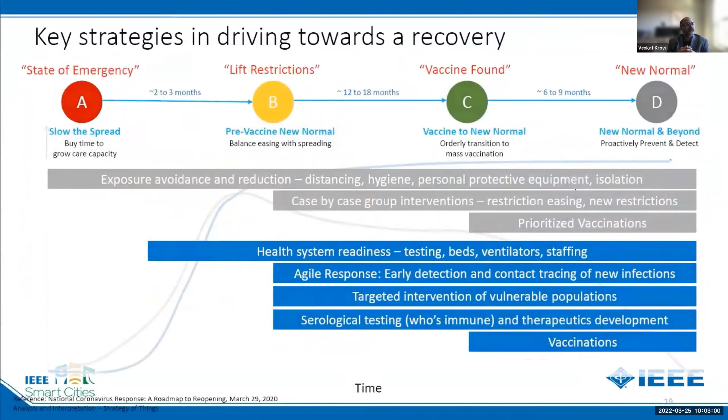We also have many educational activities within IEEE Smart Cities, including activities that count towards continuing education units. The most popular is the IEEE Smart Cities webinar, which counts with high-level technical specialists from many parts of the world, speaking about their findings on the latest trends, technologies, and solutions for smart cities. You can find the educational activities and publications in the IEEE Smart Cities Resource Center.

In 2014, IEEE Smart Cities implemented a core and affiliated smart cities program in an effort to create a community to share best practices, discuss technical topics, and create a vibrant and worldwide grid of cities on the path to smartification. We also have 12 affiliated smart cities in 4 continents. And in the last 6 years, we have reunited our community at the core cities for the IEEE International Smart Cities Conference. This conference brings together practitioners, city policymakers and administrators, infrastructure operators, industry representatives, and researchers to present technologies and applications, share their experiences and points of view about current and future smart city applications.

This year, the IEEE International Smart Cities Conference is going virtual. We look forward to you having the best experience wherever you are around the globe. We know that the pandemic restricted our opportunities to get together in person, in conferences and physical events, but we can still reunite through virtual conferences and webinars. To keep up to date with the IEEE Smart Cities community activities, join us on our social media channels on Twitter, Instagram, and LinkedIn. If you haven't joined the IEEE Smart Cities community yet, please access smartcities.ieee.org to learn how.

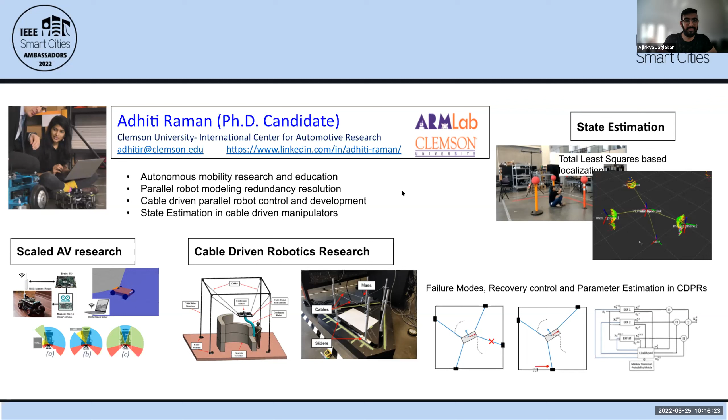Thank you, Adhiti. Lastly, I wanted to quickly introduce myself and how we got engaged with the F1TENTH program. I moved to Clemson in 2016, and as I was looking to develop a new course in robotics, I had a chance to speak with Rahul. At that time, Penn was starting to roll out the F1TENTH program internally and inviting partners to join. So in January of 2017, we deployed the first class outside of Penn with the F1TENTH program, and at that point in time, Adhiti was the TA for the course.

Since then, she's helped deploy this with other industrial partners. Our overall research looks at connected autonomy systems that blend autonomous systems—sense, think, and act in real time—with this notion of connectivity, to deploy this across a range of application arenas. There's the on-road application everyone is familiar with for self-driving cars, but there's a big future in non-traditional platforms, like two-wheel platforms. There's an entire off-road arena that started with space robotics and is now growing into precision agriculture, and last but not least, the manufacturing shop floor. Our students have found the same technology base from the F1TENTH program very useful for branching into other arenas.

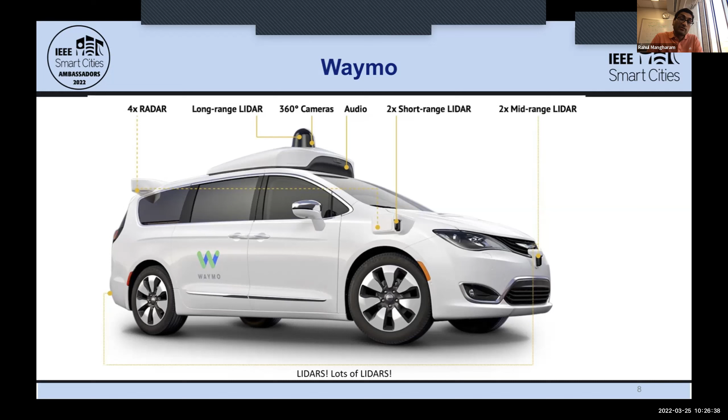It's similar on a different level. Waymo from Google has a mix of radars, lidars, cameras, and a lot of sensors involved. A lot of redundancy. They're taking much more diversity in the sensors they have to extract depth, to get much more semantic understanding of the environment. And they have both what the systems are running online versus all these companies have a lot of training that is being done offline, based on all the collected miles that they have.

Uber, for example, again has a mix of cameras and lidars. Just to give you an example, these are mostly retrofitted on existing gasoline-based vehicles. And the future is really going to a very different kind of platform where we have electric vehicles based on skateboard chassis, which are going to be very standardized. And then the autonomy aspect will be much more simpler, much more efficient, because you're working off very standardized chassis. You don't have to retrofit these legacy vehicles.

So you can think of autonomous vehicles 1.0 as: let's invest heavily in building maps and HD maps, and invest heavily in actually rolling out these vehicles and getting a lot of miles under the hood. And then autonomous vehicles 2.0 are on more efficient electric vehicle platforms, standardized chassis, and they are going to be much more reliant on learning-based approaches, which are like these end-to-end learning-based approaches. And as we'll see towards the end, these provide a lot of unknown and high risk, and that's one of the challenges.

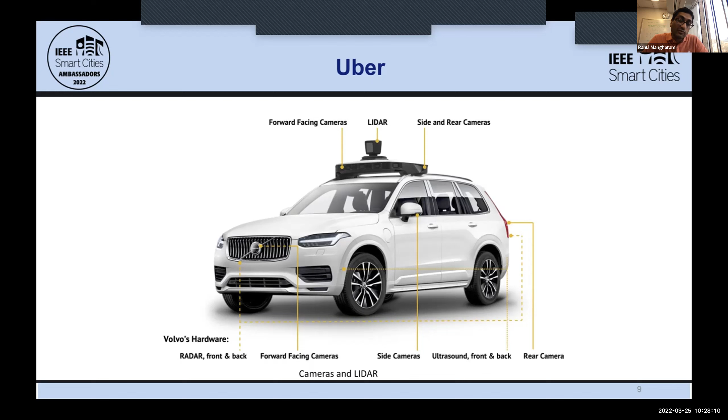So we like to think of autonomous vehicles, and specifically autonomous racing, as literally and metaphorically a vehicle for learning about these safety critical environments and safety critical systems. So we are not necessarily only focusing on vehicles, but it's today's model, today's system to understand what future autonomous vehicle challenges, autonomous system challenges we'll have.

So all of that is fed into the sensors and perception block, and that then feeds into the planners. Essentially, we're going to go through this loop of sense, plan, and then act, and do this loop about 20 to 100 times a second, so that we can keep updating the system.

So as we plan now, the mission planner is like Google Maps. It's saying, okay, I want to go from Philadelphia to Times Square in Manhattan, and says, take this path, get onto the highway I-95, and then drive for 100 minutes along that way. The behavioral planner then says, okay, in order for me to get to the highway, I need to take this on-ramp, I need to switch to the left lane, I need to overtake this vehicle. So it's making these discrete choices based on the local environment. And it's very different from a mission planner, which is really just looking at the global view over several minutes. The behavioral planner is looking at the tens of seconds.

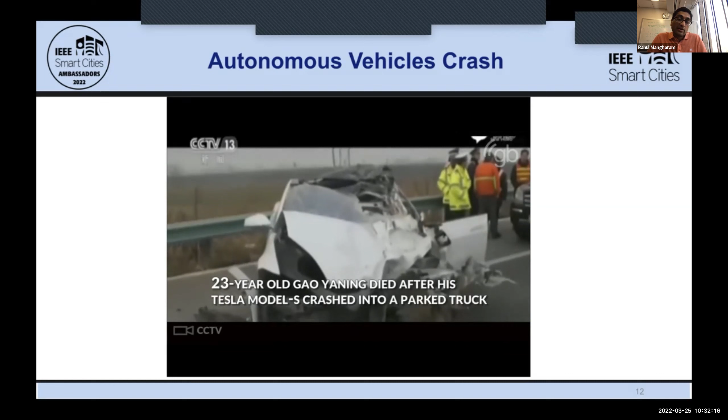Then again, later in 2016, there's a higher speed drive of a Tesla on the road, and it sees the street sweeper on the left-hand side. The vehicle just goes and crashes into it, and a 23-year-old male dies on the spot. This is something that, as drivers, we would have seen and avoided.

Again, this is not anything against Tesla specifically. It's really that they are the only videos we get are from these Tesla vehicles on the road. But this is one of many examples of things to come, and whether this method of evaluation is right or not.

Similarly, in 2018, we see more and more of these cases, vehicles taking a sharp turn along a cliff and crashing onto the side. These continue to go on. It doesn't mean these cases are the predominant cases, but however rare they are, we need to understand the underpinnings of why they're happening and the underlying engineering causes.

That's our focus, because even as recent as last summer, almost 300,000 Tesla vehicles were recalled because of safety concerns due to the autopilot system. This is not just Tesla's issue, it's all the companies and production systems that are going to come onto the road, and how do you evaluate these.

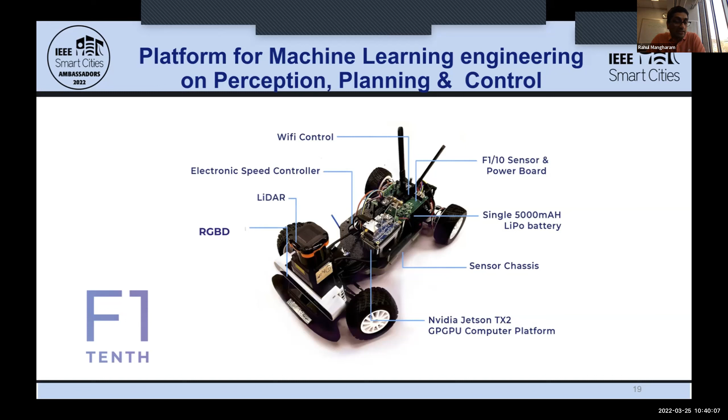I'm going to give you a glimpse of how we do that. We built this reference model of the car, and everyone can use that reference because the hardware has come together, many sensors are put together and integrated into the system. There's a very good autonomous vehicle software stack that covers perception, planning, and control, all running on the onboard NVIDIA system on CPUs and GPUs efficiently. You can use all the algorithms we talk about today out of the box in this system, so you don't have to worry about making a new system or another car. This car is ready. Now let's focus on algorithmic development. That's allowed a lot of research in the IEEE smart cities communities and in robotics communities, to work on safe autonomous systems, secure autonomous systems, multi-vehicle coordinated autonomy, and energy efficient, time efficient algorithms.

And this is all supported through different algorithms and simulation environments that we'll talk through. Our goal for today, and through the course we teach and the F1TENTH community, is to help students, faculty, researchers, and hobbyists build, code, and race these systems. You have a bunch of parts, you put them together in less than 1 to 2 hours, and then you have your vehicle, it's done.

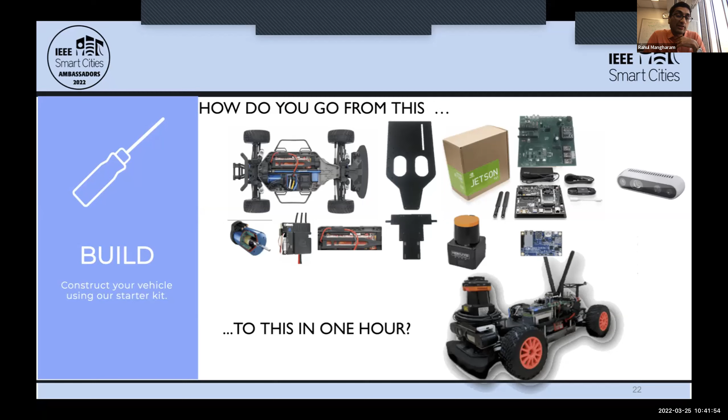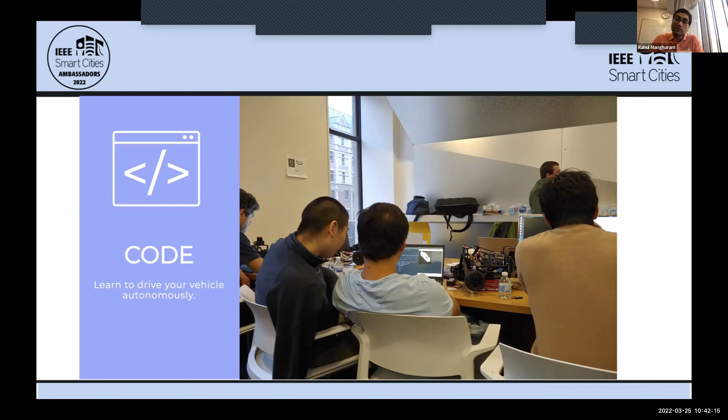The rest of the lectures here are not about how to build your car. That's pretty straightforward. We've done all the groundwork for you, and now you have a car. It's ready to code, and you can directly code on the car itself. The car is running full-blown Linux, so you can just SSH to it or remote desktop into that car, and run your code directly on it. You're not running your code on the laptop and transferring it to the car. You're just actually coding and doing everything on the vehicle.

As part of that, we developed a course schedule, and we offer this course many years. It's also fully online, and all the lectures, videos, and labs are published on the F1TENTH website. This course is broken into 6 different modules, and we'll walk through each of these, taking every student from scratch. We don't assume too much in terms of background knowledge, basically just linear systems, basic probability, and basic coding in Python or C++, but nothing beyond that, because this brings together all these aspects. First we start with the software system and robot operating system, introduce the vehicle, and introduce the simulator.

Then we move on to reactive methods, which basically say, I'm not going to build a map, I don't know much about my environment, I just know what I can see right now, and how am I going to navigate through that world.

Then we go into mapping and localization, where you understand the basics of simultaneous localization and mapping, the math behind it, the software, the code, and the algorithms. Then how do you actually build a map, localize yourself, and once you've localized yourself, how do you plan a path around it? What are simple ways to plan the path? What are more efficient and sophisticated ways to plan around that?

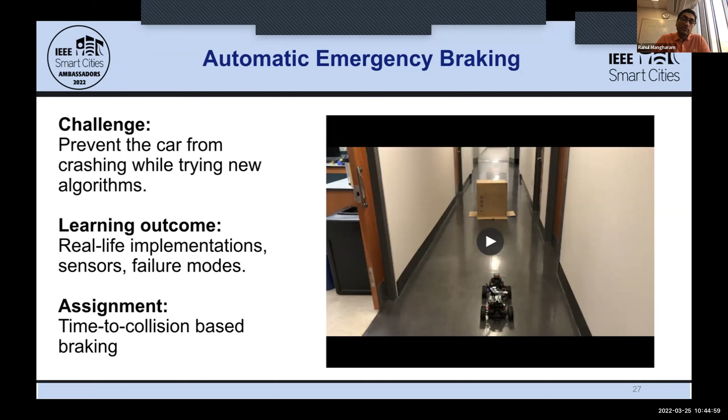In terms of AV driving basics, we'll start with automatic emergency braking. How do you build a car to actually be safe? You don't want it to crash. So how can it sense obstacles? How can it actually stop and do automatic emergency braking before it hits the obstacle? So you understand concepts like time to collision, how to interface LiDAR sensors, how to understand failure modes, what are serious problems in terms of false positives, but more importantly false negatives, and actually detecting that through the LiDAR data you're getting and being able to close that loop.

So that's essentially just the first 2 weeks. You understand ROS, then you deploy the safe thing. You will also use the F1TENTH simulation environments, both in OpenAI-style gym interfaced environments. We have all of this on our F1TENTH website on GitHub. There are also fancier simulation environments like LGSVL that have our F1TENTH race tracks and race cars involved, for more perception-oriented research and development.

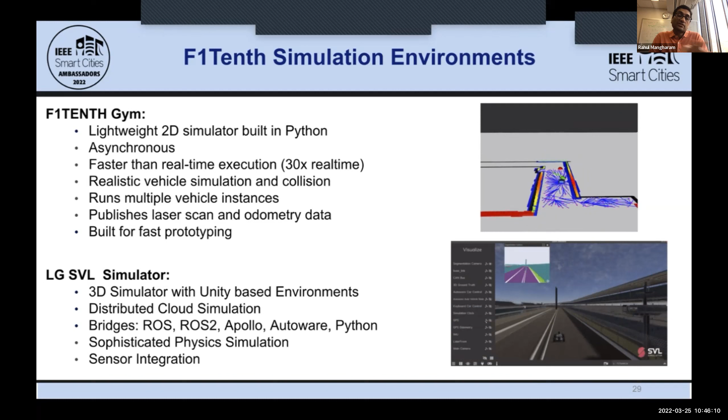The nice part is that this environment makes it very convenient for development. You'd spend about 80% of the time developing rapidly in this environment. You can crash quickly, you can recover, and then whatever code you have running in these environments works directly on the vehicle, and you adjust for reality. So there's simulation and reality, and we are bridging the sim-to-real gap.

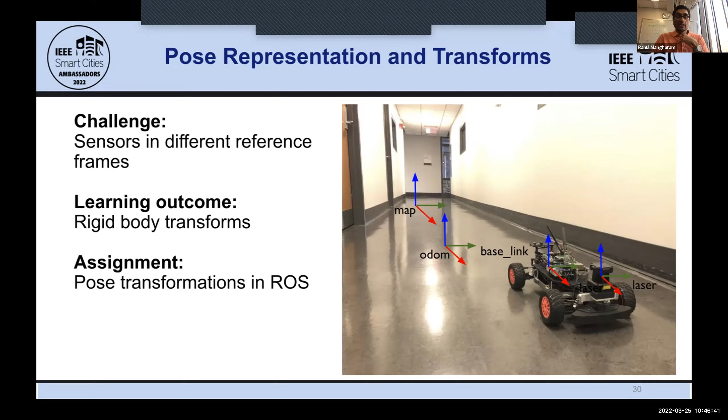So you understand how sensors are placed - that's lidars, cameras, and the basics of kinematics and mechanical engineering in terms of pose representations and rigid body transforms. How do you understand the sensor's view of the world and translate that to the vehicle's view, to the global map view, and whatever problems you have in terms of doing coordinate transforms and pose representations in the real vehicle, because you have multiple sensors and each sensor is viewing the world from its own frame of reference.

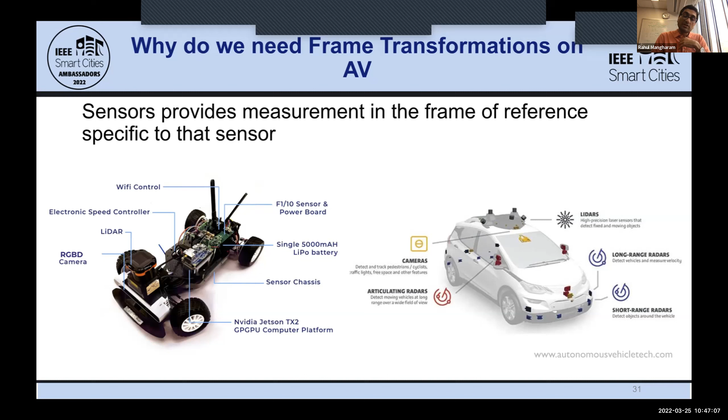How do you combine that to map it into a global reference? We have to do the same thing on our vehicle to capture these multiple sensor views. As you can see, we have a local frame of reference, where the world is moving around us and we are fixed, versus on the left side you have a global frame of reference. How do you translate to that, where it's much easier to understand where you are on a map and combine all the sensor views?

Then you work with the actual vehicle and tune the speed controller and the steering controller, which is an easy to access system - it's all in software now. You don't need to do any soldering or hardware development, you're just tuning the system to understand that, because then you need to understand reactive methods. I'm getting my sensor inputs and I need to do rapid obstacle avoidance - how do I do that?

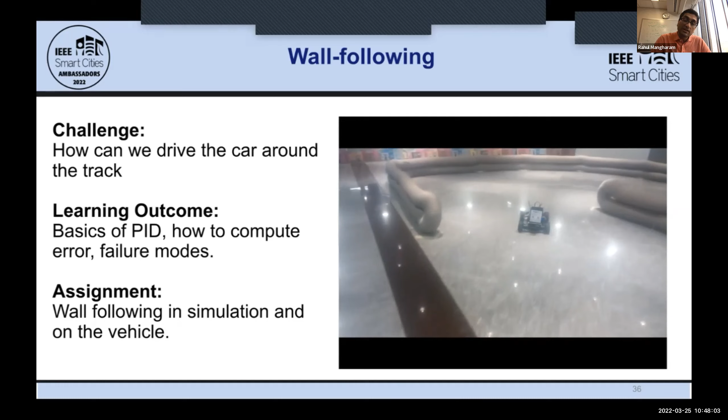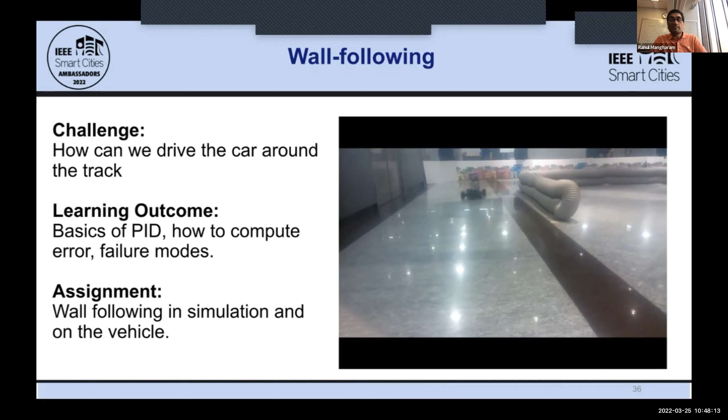So first we have wall following, where you just detect the wall. It's kind of like you'd have in high school or middle school, and then in undergrad courses where you're doing line following, but here we are following the wall using the LiDAR. You can see the vehicle is able to navigate, it's doing it rather slowly. This was how some of the early races we had in 2016, 2017 did that - just reactive methods.

So then you understand how to tune your PID controller. There's a lot of work done by Houssam, who will talk now about how we go from single car to multiple cars later on. But this essentially helps us now in terms of tuning - how do you tune your PID controller to have very smooth navigation and follow a path without much oscillation?

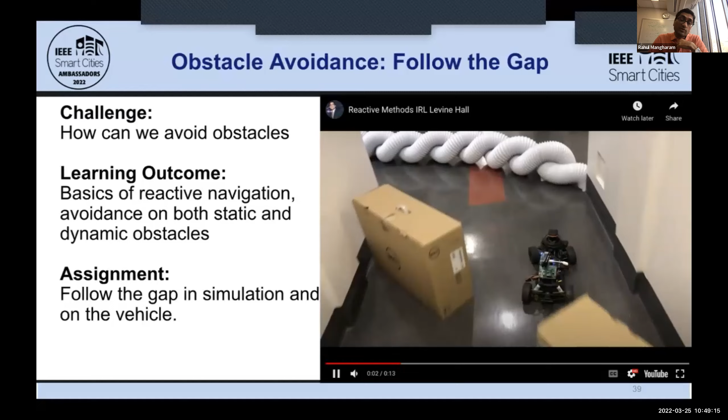So once you have your car tuned and ready to roll, you then program it to do obstacle avoidance. First you do that for the real world map, but in simulation. Once you're able to navigate that very efficiently, then you put the vehicle in the real world and you can see it work in action like that. So the simulation environment helps reduce a lot of frustration also.

Moving forward, the first race is just using these reactive methods. Here's an example of a race we had back in 2018 in Portugal, where you can see the cars going around the track, but just using the LiDAR inputs streaming in. It does not have a sense of a global map - it's still able to do pretty well.

Then moving forward, we have map-based methods. Essentially here we have to understand the basics of scan matching, which is an integral part of the SLAM algorithms, of simultaneous localization algorithms. We understand one particular method called the iterative closest point algorithm - basically, if I have a previous scan and then I take a new scan, how do I try to match these scans to know how the robot has moved from the previous frame to the current frame?

So what are efficient ways to do this? How can you do this in real time? We read a paper that implements this scan matching algorithm, and that allows us to code it up and really get an in-depth look at what's involved under the hood with these SLAM algorithms.

Then we use off-the-shelf SLAM algorithms. These run on the car to actually build a map, and once we have a map of the racetrack, we can drive through that environment. As the car is driving through this environment, we have a very high quality map, and this runs very efficiently on the platform. Now that you have a map, you need to localize yourself.

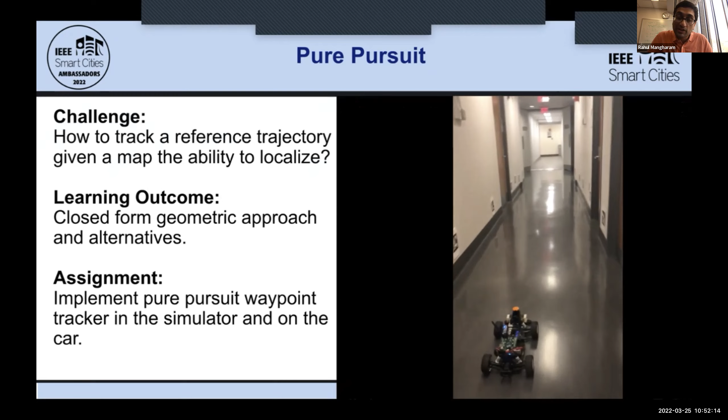Once you're able to do that, you can drive the car much faster. Here you can see our teaching assistant getting a good workout, but this car is now driving twice the speed of the previous reactive methods. So we are getting much better, the car is getting much smarter, much more aware.

That takes us to the next race, where you use these map-based methods to efficiently navigate through the track, figuring out the most efficient pure pursuit path to use. This is from our 2019 competition race in Montreal, where most teams used this approach. We use these competitions to push how we teach the course further, incorporating what was developed in competitions into the curriculum.

That brings us to the final part of motion planning: how do we have more efficient, more agile methods using things like rapidly exploring random trees, and variants of different motion planning methods, which you can do both in simulation and then execute on the real car.

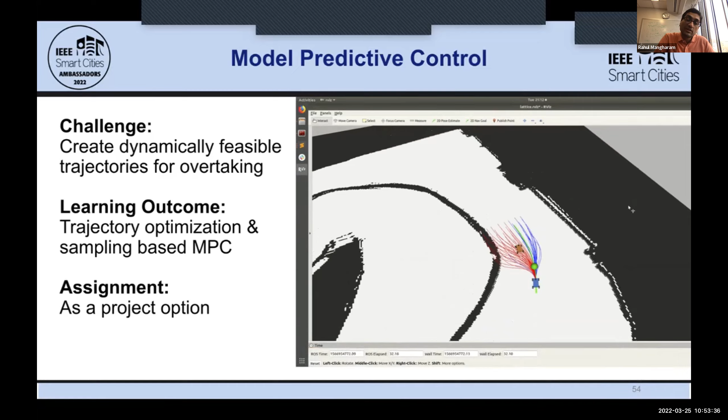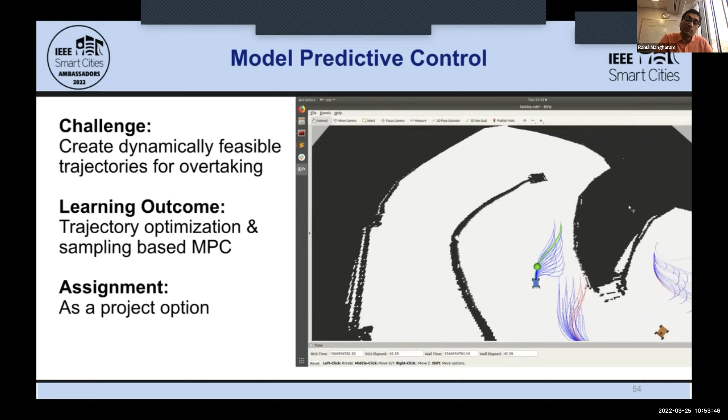In order to track the vehicle along a motion path, we introduce model predictive control as the next step up from PID control, to have a combination of safe and efficient pathways for the vehicle to follow smoothly along the track.

Finally, we introduce different concepts in learning and vision. We start with classic computer vision: how do you detect April tags, how do you estimate the distance of vehicles around you, single view geometry, homography, detecting features, and prediction.

This allows us to have a lab on how to train, based on a data set of vehicle images, a way to identify the vehicle without April tags, developing a convolutional neural network based object detector for overtaking. This is lab 7 out of 8 labs in the course, and students develop this detection pipeline and have to make it run fast. In this video, the pipeline was running at about 72 frames per second on the platform.

That introduces a lot of projects the students then do, like imitation learning, where you drive the car for 5 minutes and the system learns to drive as well or as poorly as you, trying to minimize the error between how you would have driven and how it starts to imitate you. This was one way of training, and was also used as a reinforcement learning based project option.

So when you have a course such as this with a number of obstacles, what is the best way to navigate a course like this? Are there any suggestions from the audience? If not, I should just go ahead and talk about some of the different ways in which navigation of such a course can be addressed.

You can have a map, for example a Hector map or some sort of occupancy grid map of this entire area, create a race line like Dr. Mangharam has mentioned multiple times, and then have a planner in order to move the vehicle around that race line. But another way to approach such a map is to have a reactive planner, that is without any foreknowledge of where the course is, how the course is shaped, or where the obstacles are. A different way to approach this is to have a reactive planner that is only locally reacting to the obstacles and the environment around the vehicle.

So how do we best develop an obstacle avoidance system like that? What are the objectives that we want from something like this? We want to essentially be able to keep away from the walls, at the same time avoid obstacles that are both sparse and cluttered.

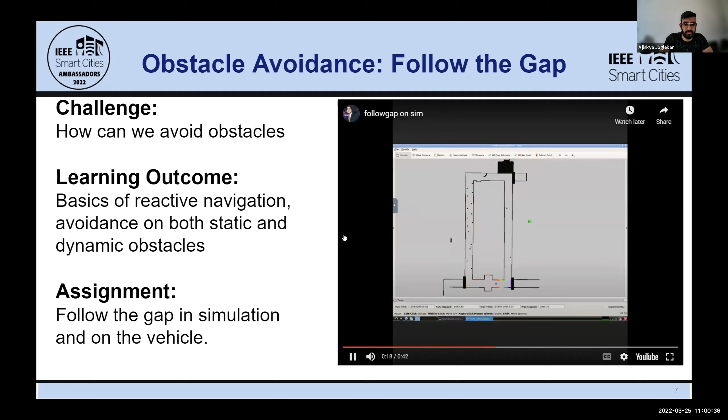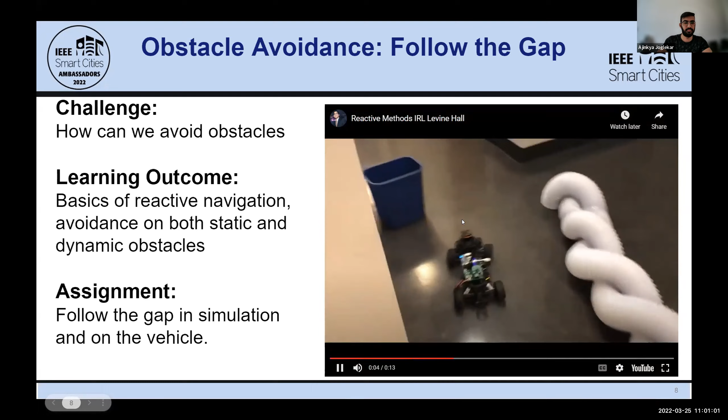As you can see in this video, this vehicle is using a reactive planner in order to navigate this, reacting to a follow the gap algorithm. You can see it's a reactive planner, especially because the PID is not particularly tuned well in this video. You can see certain oscillation as it comes to a smooth walled environment. But the advantages of having a reactive planner such as this is they can be quite agile and very responsive to both cluttered static obstacles as well as dynamic obstacles.

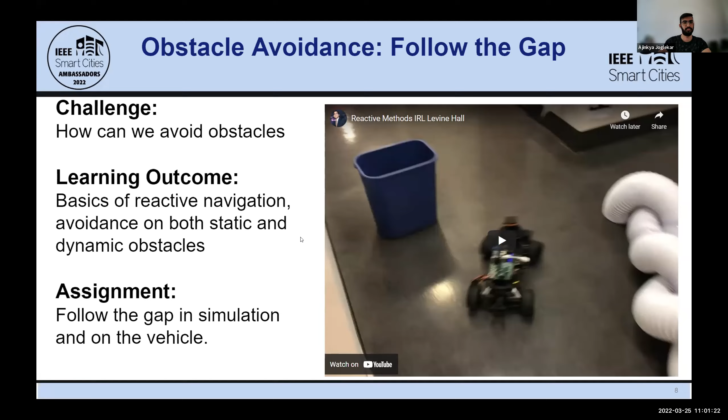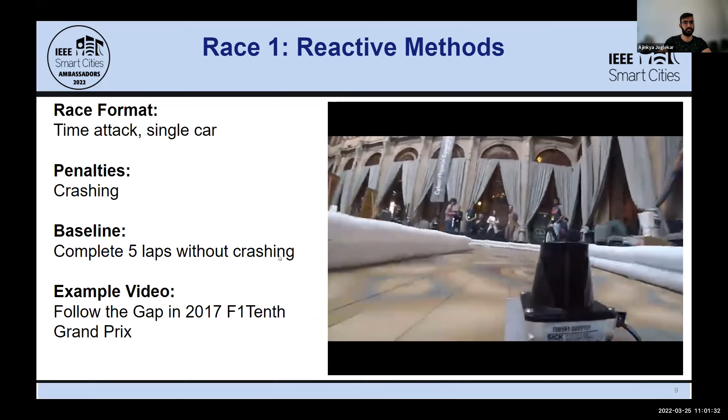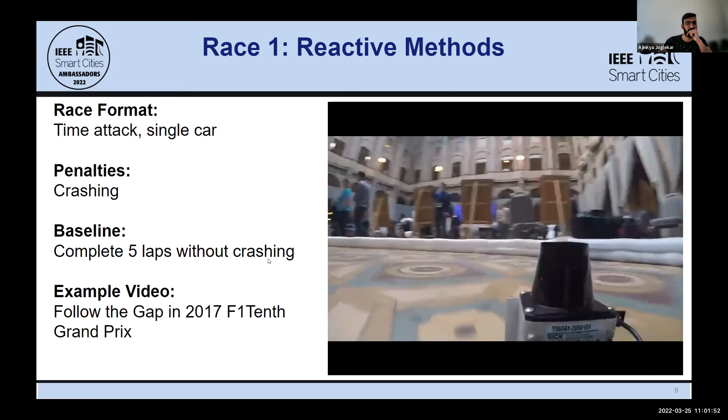In this video, this is a video that Dr. Mangharam's students have taken during their F1Tenth competition in 2017. It's a few years old, but this shows a very effective demonstration of a reactive controller around a track that is free of obstacles. You can see that the vehicle is not necessarily keeping to the center line of the track. It is going fast during straights and slowing down over corners in order to take these turns effectively. It is also a little bit free of the kind of oscillation we saw in the previous video, which shows a very well-tuned controller or certain modifications on a very simple PID controller.

So how do you get to that kind of a performance level? How do you get to that kind of performance without a map, without having a defined race line? One of the more basic controllers is the follow the gap controller, and certain extensions on this very basic follow the gap controller can lead to very good performance from this controller.

Ajinkya and Ameya will discuss the disparity extender and other approaches such as the bug algorithm later on in this lecture. So given that you have a scan of the area, given that you have a LiDAR on the car and you're getting a LiDAR scan of the environment, how do you define the most optimum area that the vehicle should traverse?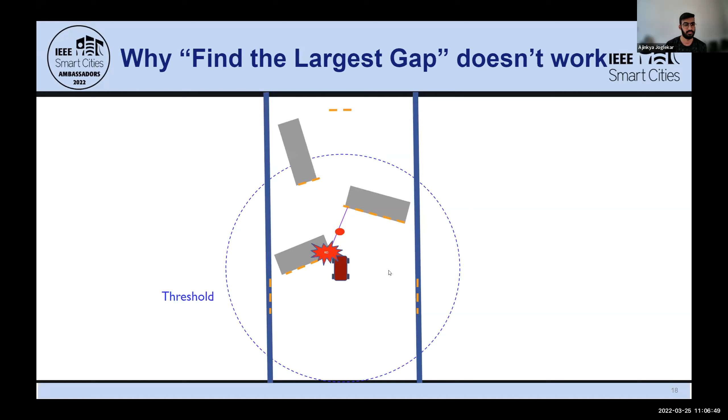We have a gap here that we want the car to go through, but the way in which this vehicle travels, we will not be able to reach this position without colliding against these two obstacles. And this is because of the non-holonomic nature of Ackermann steered vehicles, of cars.

Holonomic meaning holonomic vehicles are basically vehicles that can turn on a whim. If I had a vehicle that only had two wheels here, if I cut this car in half, I should be able to turn this vehicle left or right without having to move the vehicle forward in order to turn left or right. These are called holonomic robots, and such an algorithm would work very well for holonomic robots.

But for car-like vehicles that need to go forward a certain distance in order to turn left or right, these algorithms can sometimes have drawbacks such as these. So in order to account for vehicle safety and to prevent these things from happening, we cannot use a naive follow-the-gap algorithm. We need to add certain modifications to a general algorithm to make the vehicle move forward with good performance and good robustness.

One of the ways this can be done is by trying to enlarge the obstacles around you, providing a safety distance from the obstacles to prevent the vehicle from colliding with them. For example, if my vehicle has a certain width, I can reduce that width down to a point or a line by artificially expanding the size of the objects around you. Now Ajinkya will discuss some further tweaks we can add to the follow-the-gap algorithm to make it more robust.

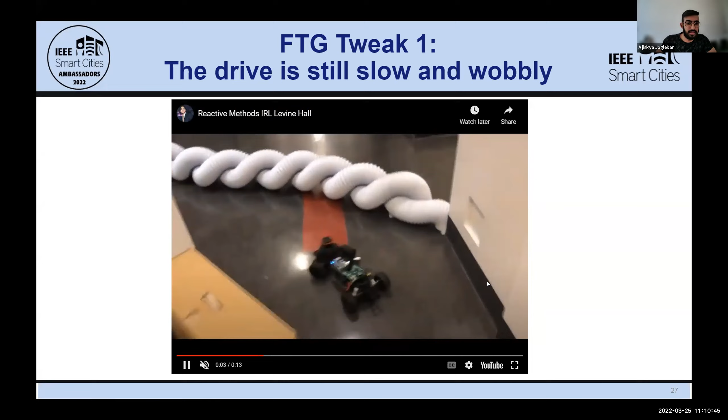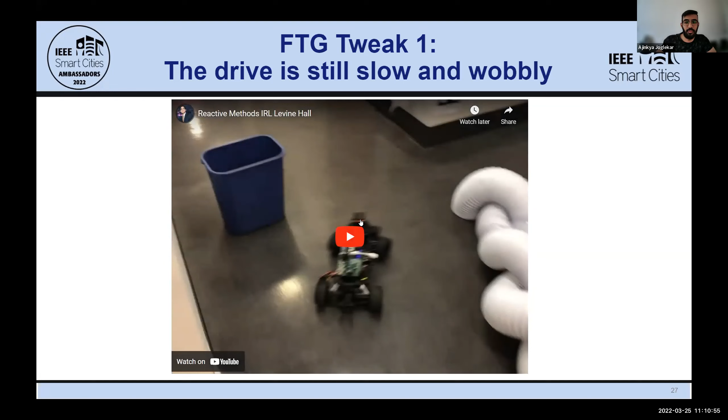But now there comes a question: if the obstacles are relatively far away, do we need to swerve and change our target point at every instance? This is why, in the naive approach, you saw the vehicle motion being wobbly around obstacles. So in this tweak, we selected the closest point to the vehicle, added an inflation radius as obstacle space to the obstacle in front, and filtered out the area we call a gap. In this free space, we select a furthest point to track. In this video, we see that even though it tracked the obstacles beautifully, when we have a relatively open space, the car is still wobbly because it's switching from one point to another to navigate the environment.

To overcome this, the people from the UNC team, winners of the 2019 F110 Grand Prix, came up with a different approach called the disparity extender. As a modification to the follow-the-gap approach, this algorithm, instead of finding the closest point to the vehicle and having an inflation radius around it, just goes for the furthest point from the vehicle. What happens if you just select the furthest point is that the LiDAR readings assume the LiDAR is a point object, and don't consider that the vehicle has its own width and dimensions. As a result, if you just try to follow the furthest point in your environment, you're certainly bound to hit some obstacles you haven't considered.

So for this reason, similar to adding an inflation radius around the obstacle, what we do is create something like an inflation radius pertaining to that gap, where we find the disparity in the readings in that particular window - hence the name disparity extender. As you can see, the blue arc represents us trying to filter a specific range of distances, defined by the threshold around that point of maximum distance.

And we find that as we go left, there is a curvature in the path which will naturally bound us to hit that. Once we've seen there is a curvature or restriction in this area, we find the minimum distance in the inflation radius, and modify our LiDAR scans to map out the minimum distance in that area. We do this for the whole gap and find a point where the minimum distance around it is greater than its adjoining points, effectively finding the point at maximum distance from the vehicle that is also traversable given the width of our vehicle.

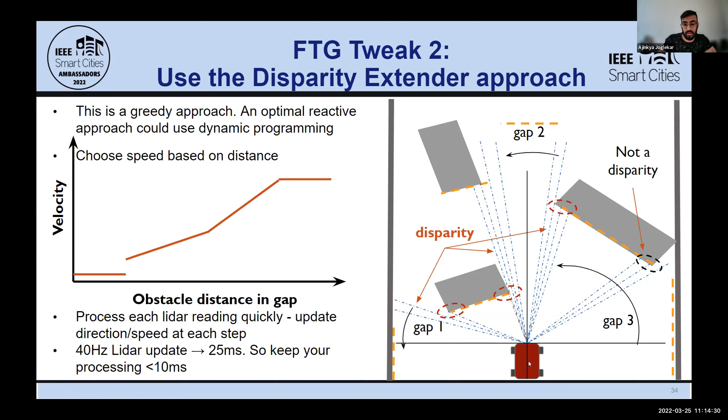There's another tweak we can do: control of linear velocity while navigating through our environment. Here we can use a greedy approach with an optimal reactive approach for dynamic programming, where we find different gaps, calculate the disparity extension, and based on this generate a velocity profile depending on the distance to the gap or the furthest point. This gives us a piecewise linear optimal policy to go from one point in the environment to another, doing it recursively while mapping out the disparities.

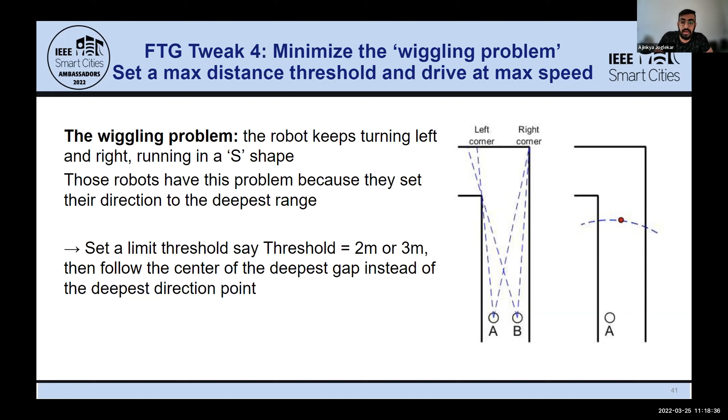In order to mitigate this issue of variance in performance on sharp corners, we make a modification to mitigate the wiggling problem, wherein we set a max threshold. With this threshold, we try to follow the center of the deepest gap as opposed to swerving at every time instance. This way, in long corridors, the vehicle can go straight and have a decent approach to the corner where it can see the largest gap and take a turn in time.

So this has been deployed, as mentioned before, in race settings, and reactive methods, since they don't require explicit mapping and can be really fast.

And you can tune it really easily, have been really popular for racing. And in the later stages of the course, people have also used imitation learning and other deep learning based approaches to basically come up with strategies for following the gap.

I would like to now hand it over to Ameya to basically talk about the OpenAI gym and following the gap and other algorithms. Thank you, Ajinkya. Am I audible to everyone? Yes. All right.

So this method, follow the gap, Adhiti and Ajinkya both discussed how the theory works. The practical implementation of this method has now been made available as a part of the course as well. The links you can find in the chat window, which Dr. Krovi just put in a couple of minutes back.

So the idea is, if you had, let's say, a Python script to develop this code, you would do things like initialize your agent, you will initialize your driver, basically. Then you would set up the AI gym. This would be like a simulator engine. You will set up the engine. If you want to add more drivers or more players, you would add it to that. You will set up what their starting points are.

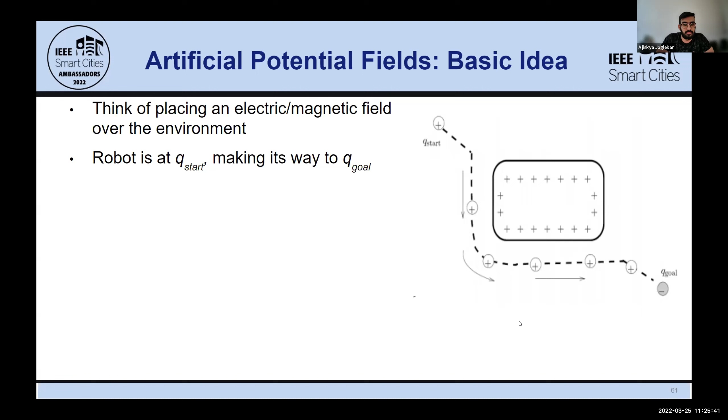So you have the obstacles given by, let's say, a positive charge, and the vehicle itself is given by a positive charge, and the goal is given by a negative charge. So the positive and negative attract, that's why you try to move towards the goal, whereas since positive repel, you move away from the obstacles. So this is the basic gist of how you would develop your potential field approach.

This is like a binary way, but now you can also implement something known as the gradient descent algorithm, in which you try to steer away from the high peaks, which are like peak positive zones, and then slowly slide inside towards the negative zone, which would be your goal point. At every time step, you would calculate the gradients and move towards where the gradient is minimizing. Similar to the bug algorithm, this approach also has its own problem. The basic problem is that you will have to calculate the gradients repeatedly, so it becomes computationally expensive.

What other point is like, again, you need to know what the global point is, from where you are and where you want to travel. If you don't have the global point, if you decide to choose any local point as a goal point for a particular time step, then how do you choose this local point is another challenge with this. You can find out more information about this. But because of these certain disadvantages, these methods are usually avoided, and follow the gap and its various tweaks are now a more efficient way to go about it.

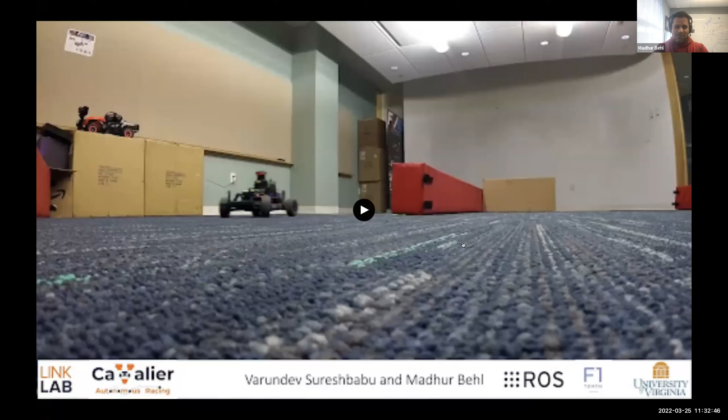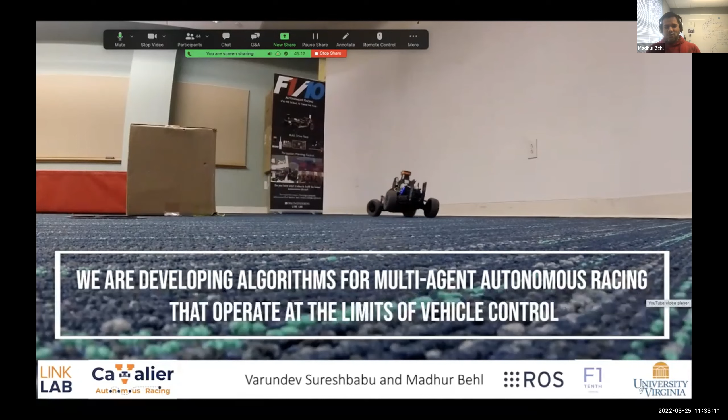This is just a small snippet of what the car can do. At high speeds, you can go so fast that the wheel comes off the ground. You can see in the slow motion video that the car is going so fast that it's tilting, but it's able to maintain that balance and come back.

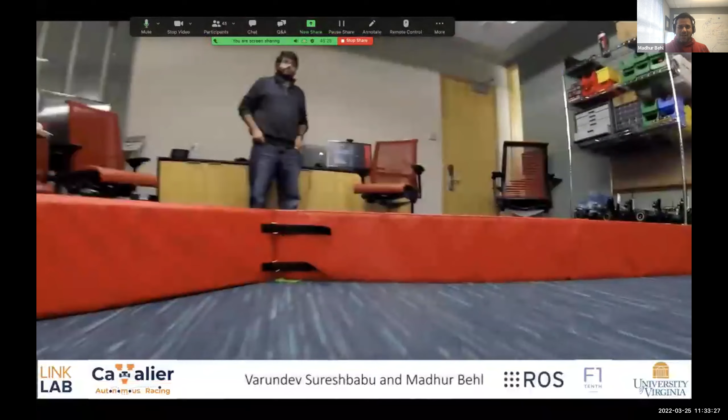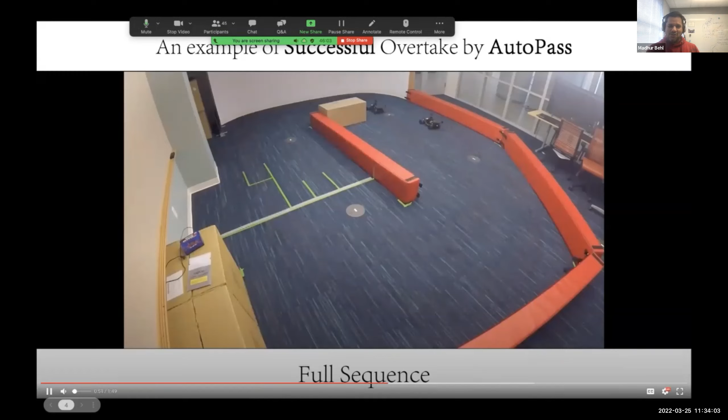Here, what you are seeing is we have two agents, and one of them is actually trying to figure out and predict where the other agent is going to be. It's going to synthesize a path to overtake the opponent on the inside, like racing drivers do. We are distilling that into a set of sub maneuvers, but you can see how it can track the car, find this opportunity to overtake, then step on the throttle a little bit earlier and get out of that corner soon.

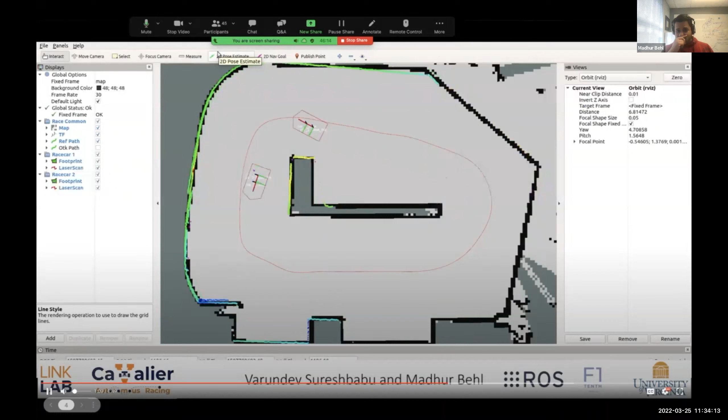Like Venkat said, simulation is definitely key to implementing many of this. So here you can see what that looks like in simulation. This is not the exact scenario we saw in the video, but you can see the car is trying to overtake on the outside in this case, and then merge back to this reference trajectory, shown in the solid red line.

The science behind this, and many of these maneuvers, relies upon the ability of the race car to go from its current location towards a waypoint, or towards a target, as we say. There are many ways to do this, but one of the simplest ideas is what is called pure pursuit, and that's what I'll try to describe in the next 20 minutes or so.

What we are assuming here is that we have a race car, our F1TENTH race car, and we are given a trajectory. A trajectory in robotics is just a sequence of waypoints, which are X, Y coordinates of positions sequentially laid out on the track. That could correspond to the race line you want to follow for the fastest lap time, or a trajectory you may want to follow to avoid some static obstacles and things like that.

So we assume there's some algorithm, oracle, or mechanism for us to obtain that trajectory or sequence of waypoints. We can derive the XY position of any waypoint in our own inertial frame, or in the frame of reference of the vehicle itself. Our goal is to now track or follow these waypoints, and that's what pure pursuit allows us to do.

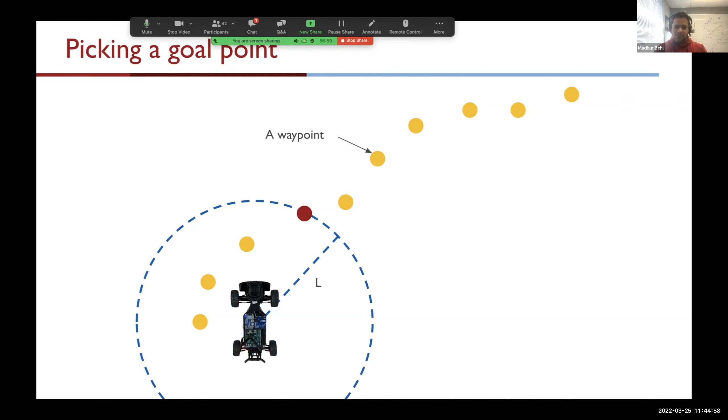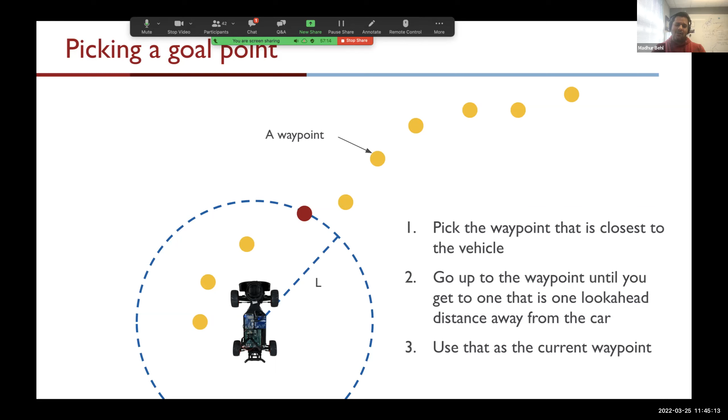So we pick the waypoint that's obviously closest to where the vehicle is, a certain look ahead distance. We will drive towards this look ahead distance. We may not actually reach it because we can keep repeating this algorithm. You drive a little bit forward, and then again a time has come to make a decision: let me look ahead another distance L, see what is my next candidate waypoint.

So sometimes you will not be so lucky. Actually, most of the time you will not have an exact waypoint defined at the exact look ahead distance at every point in your racing line. In this case there's many things to do, but let's go with the most intuitive and straightforward thing. I can pick the next waypoint which is just outside my radius.

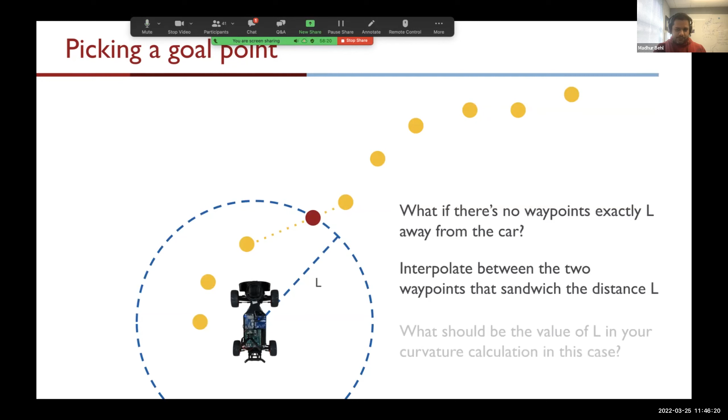Or a more rigorous way would be to interpolate between two successive waypoints, one just inside and one just outside, and derive the coordinates of this pseudo waypoint that did not exist originally in my trajectory, but I'm creating it so I can solve my previous relationship to govern how much to steer. So I can obviously interpolate between these two waypoints. I hope that idea is clear.

So how do we actually put this together? We are at a given location and we are given a trajectory, which is a sequence of waypoints. Given a look ahead distance, we calculate what should be our goal, what should be our target, based on interpolation or closest nearest neighbor, whatever works. Then you actually drive — pure pursuit is just controlling the steering.

So pure pursuit is what we call a lateral controller, because I'm not calculating how fast we are driving towards the waypoint, which would be a longitudinal controller. We are just controlling the steering angle. So this is lateral control — we actuate the steering column towards that waypoint, and as we drive towards it, we do another iteration of this loop. This loop could be the control loop of our robot, where we localize to find where we are and repeat this entire process.

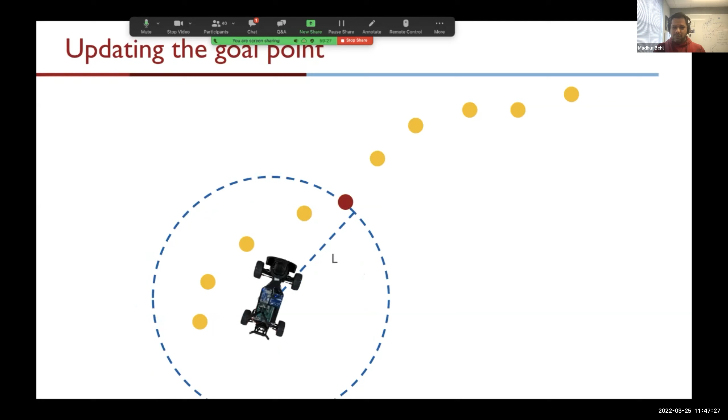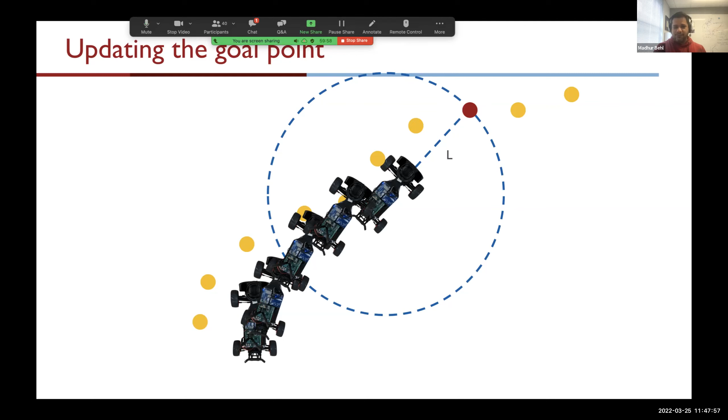So visually that would look something like this. You have a goal that you derive to drive towards. You drive a little bit forward, you find a new goal. You drive a little bit forward, you find a new goal, and so on. Ultimately, if you trace how your car has driven, it may not physically pass through every waypoint — actually it's very unlikely to pass exactly through a waypoint unless it's a straight line. But it is tracing the profile of your trajectory. That's what tracing a trajectory is. You can define how closely you want to track the trajectory versus how smooth you want the profile of the car to be. That, in a nutshell, is what pure pursuit does.

So let's understand the effect of this look ahead distance. If you notice, that's the only design parameter.

I'm not assuming anything about the wheelbase of my car, or about the forces on the tires and things like that. So it doesn't use a model of the vehicle, but it's able to steer because we have a goal and we know where the vehicle is. We have the basic information. So the only way we actually have to control the behavior of the car is the look ahead distance.

That's the sole parameter within the seminal pure pursuit. And so if you think about it, a smaller value of the look ahead will result in very closely following the curvature of the arc, because you're not looking very far apart. So the closer your waypoints or goal points are, you are making very minor adjustments to the steering, so you'll be closer to your desired trajectory, but it may lead to very small radius of curvatures.

And remember that the radius of curvature is inversely proportional to the steering input. So you may have a very tiny arc because the look ahead was so small, and it may result in very extreme steering. So it could result in arcs that are actually not feasible to be tracked by the steering column of the car. That's what is meant by it might be against the dynamical limits of the vehicle itself.

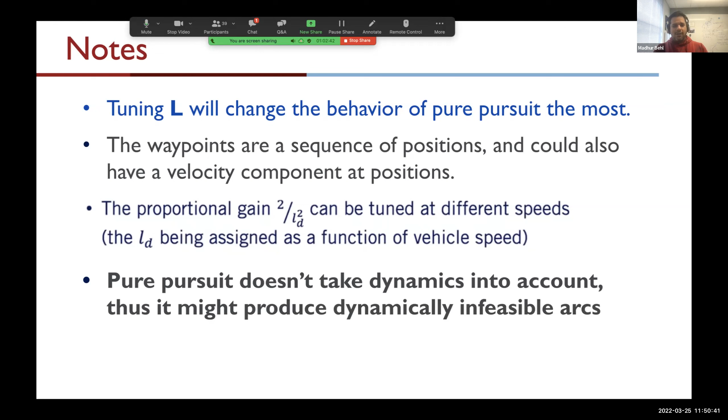I'll show you a video which actually convinces you of this. So here is one idea to fix this behavior, that pure pursuit doesn't take dynamics into account and might produce infeasible arcs that we've just noticed. It will get the job done for the most part at slow speeds, for the F110, if you're just learning pure pursuit it will work very well out of the box, but there is room for improvement. Let me show you one of many ways in which you can improve pure pursuit.

The first idea is what we call Ackermann adjusted pure pursuit. Instead of assuming that we just have knowledge of the base link, we actually assume we know something about the geometry of the car, where the steering column is located, what the wheelbase is, and things like that. When we take this geometry information into account, we can do a little bit better, so we can track the reference trajectory. It is not really a full-blown kinematic model of the car at this point, it's just adapted. We are using what we call a quasi-model version of pure pursuit.

In fact, the reason we do it is we are adjusting for this Ackermann behavior. If you're not familiar, Ackermann steering is the same as what we call non-holonomic steering. So your car that you drive cannot spin in a circle of zero radius. It will take some, basically it has a minimum corner radius that it can achieve, and that's because of how the steering column links work.

So what is this Ackermann steering adjustment to pure pursuit? We assume we know the wheelbase of the car, and that the steering column can have some range in which it can steer safely. Then we use this information and combine it with the knowledge that we have to trace this arc inversely proportional to the radius of curvature. I haven't gone into super detail in the math yet, but basically we are incorporating the steering column and calculating the steering error from the front axle. So we are only turning the front axle of the car to get to a point, and we are now using the position of the rear axle as a feedback mechanism.

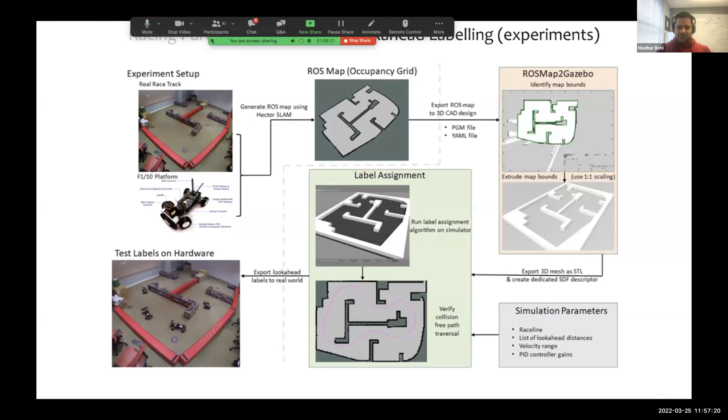So you have all these competing objectives. If you increase the look ahead, something good happens, but you lose something, and vice versa. So now you can start thinking of combining this as the best of both worlds. You could say, I want to weigh 50% speed, 50% tracking, or I want to bump up the speed parameter. It could be a convex combination of both of these. Let's look at how this works.

You can see that we can generate this multi-label look ahead distance. You can notice carefully how the look ahead increases or decreases based on how the reference trajectory is colored. Colored is just the assignment, so those waypoints have the short look ahead in red and the largest look ahead in green. Our F110 car is using pure pursuit, Ackermann adjusted pure pursuit, to follow this reference trajectory.

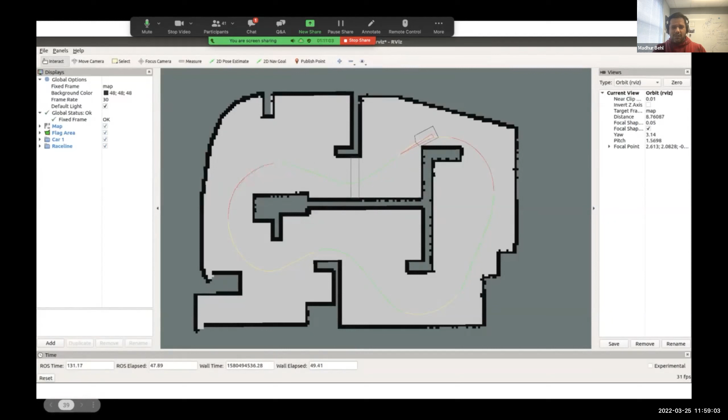So we can do this in RViz, which is a 2D view. And like I said, we can import a real world track automatically into Gazebo. So you can really test your pure pursuit, improve, make adjustments in simulation. You can crash many, many times in simulation, so you don't have to do that in the real world.

And then you just export this directly onto a ROS node on the car and everything comes together. This car has now figured out how to dynamically use different look ahead distances as it navigates its way around a pretty complex track. It has a lot of sharp turns, but this is doing a really good job of going around.

All right, so this was F110. I want to conclude by telling you a little bit about this extraordinary claim I made in the beginning, that you could translate this to the full scale car.

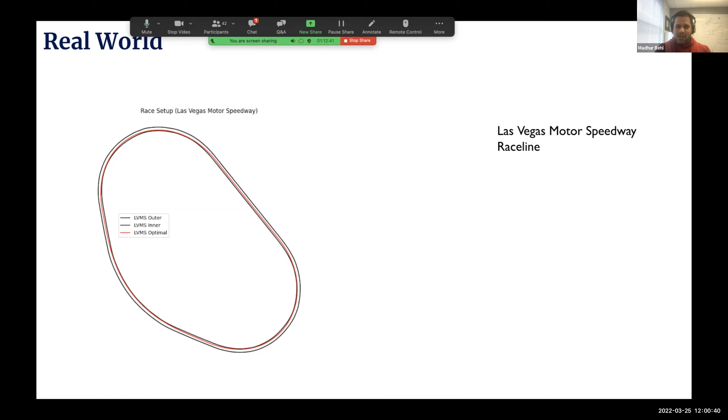But we will just need a semantic map. We only care about where the bounds of the track are. So we have the inner bounds, the outer bounds, and the red line is a race line. I believe Johannes will talk about how the race line is derived and how it's used for planning. So we have this race line in the track, and just like we had a reference trajectory in the F1TENTH car, now we want to follow this trajectory.

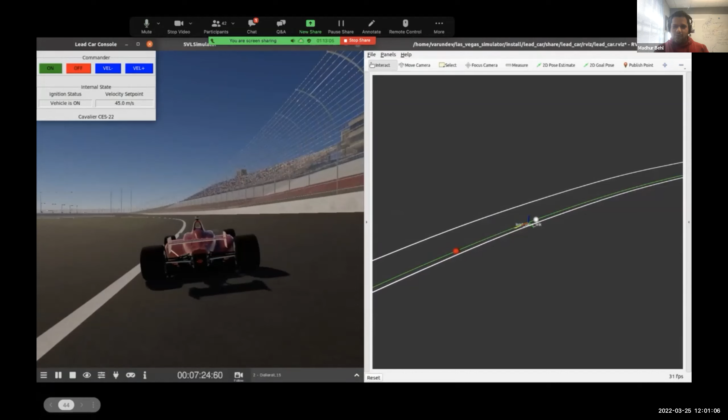So instead of the F1TENTH simulator, here we are using a simulator called LGSVL. You can see on the right-hand side the visualization of a very basic pure pursuit, Ackermann adjusted pure pursuit. That red bubble is the look ahead point that it's trying to track, and it's actually doing a very good job of locating the base link directly on our reference trajectory as this car drives around the track. So this is again going from map to simulation, and then we can actually do this in the real world. I will say it is not advisable for a real race car to just use pure pursuit.

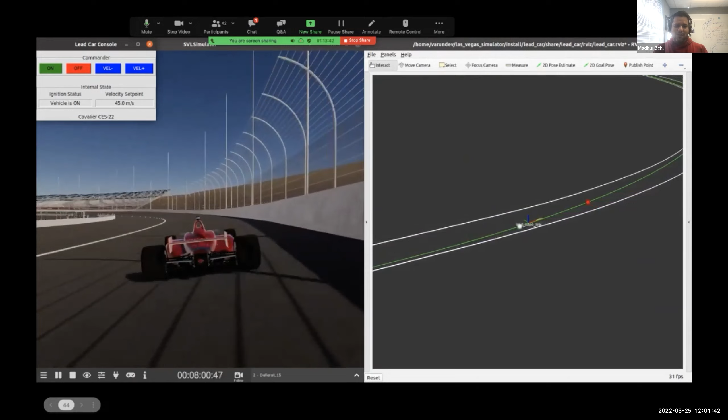Remember, the limitation of pure pursuit is it has no knowledge of the dynamics of the vehicle. It's just a geometric lateral controller. A more suitable, advanced controller that takes into account tire forces and how much power and torque is being given to the car is a model predictive controller, but that's out of scope for this tutorial.

So let me show you two examples. One, I'll show an example of corner cutting in the real world, and then an example where it actually does a pretty good job.

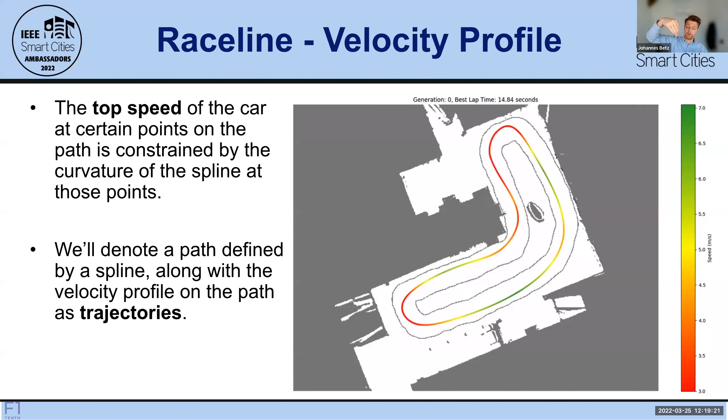That means we also need to optimize for the velocity profile, and there are various techniques you can use. For example, an evolutionary technique that has generations and optimizes the velocity profile on a given path. Or a so-called forward-backward solver, where you hand over your path and it optimizes for the turns, going forward, going backward, and finding the optimal acceleration for one turn.

But more or less, the race line is what you want in the end, and that's the one you want to follow to be as fast as possible. But the race line only gives us the possibility to follow a path when nobody is around us. What we want to do, and what you already learned today, is overtake other cars, because we want to make advanced decisions. We want blocking maneuvers, driving behind another car, going to the right, and then moving back in again. That's what we know from Formula One cars or Indy cars, and that's what we want to achieve.

So now we take a deeper look at one of these techniques, because for advanced local path planners you can choose from a wide variety. We just heard there are optimization techniques, for example the MPC, which samples a trajectory - that's a control technique, it samples a new trajectory that we can follow, and that's a big optimization problem. The optimization requires a convex problem description because non-convex problems are very hard to solve.

Optimization is computationally expensive. You need good solvers, a good optimization problem, good constraints, you need to know a lot about your model. And in the end, we get a very smooth path with no discretization issues. So we have some trade-offs, advantages and disadvantages.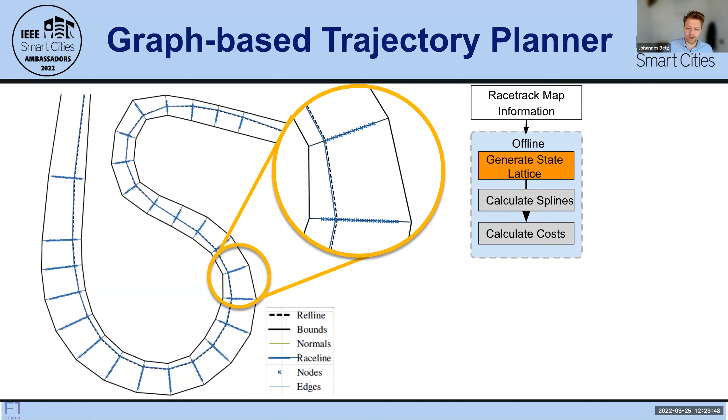What we then do in the next step is calculate the splines and connect each of the nodes with each other. What you see now here in blue is our graph network, a complete graph that is capturing the whole racetrack, and this graph consists of splines.

In splines we have 3 versions of continuity. The first is C0 continuity, continuous only in position. Then C1 continuity in the middle, continuous in position and tangent line, meaning position and speed of the car. And then C0, C1, and C2 continuity, continuous in position, tangent line, and curvature, meaning for our car, position, velocity, and acceleration. That means if we have the transition from one spline to the next, we can guarantee that our graph is continuous in position, speed, and acceleration.

And that's what we're doing here. So when we connect our graph on this racetrack, what you see here in orange is one example, from one node to the possible next nodes. The first thing you see is that we cannot drive from one node to all of the other nodes. That's basically because our car can only drive certain maneuvers. So if you're at a certain speed, in a certain position, your car cannot move, for example, to the left outer bound of the racetrack. It's not possible from a dynamics point of view. So only a handful of nodes are connected to one node.

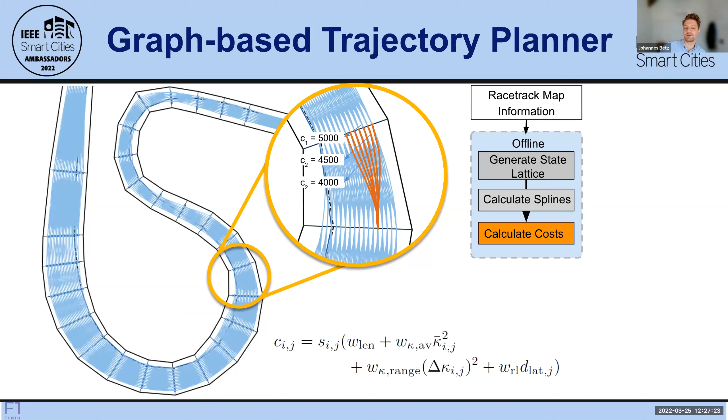So we define the cost values, and everything you have seen now can be done offline. That's very cool, because now we have done all these computationally expensive things. We save our graph, and then we move online to the car. You bring your saved graph on a USB stick, put it in the car, download this graph network, and then start the online part.

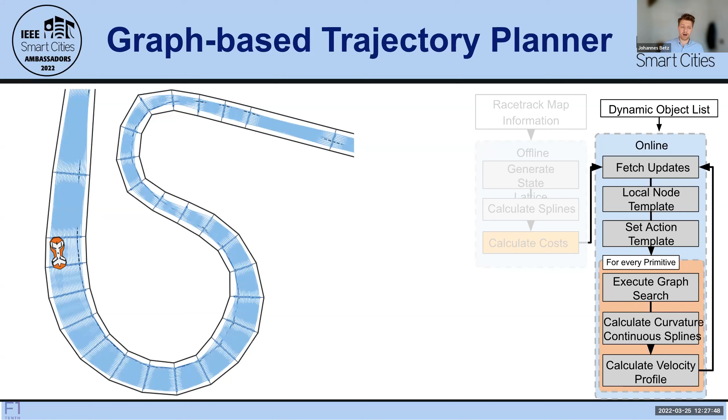The online part you can think of as a calculation that runs every 20 Hertz through the complete pipeline you see here on the right, which means our car is starting on the racetrack, seeing now the complete graph. The first thing the car does is fetching the updates, like where am I on the track, what is happening around me on the track, for example objects driving around. Where those objects come from, like from an object detection or from V2X, we don't care right now.

The first thing we do in the online part is setting up a so-called local node template by filtering edges of the full graph. First of all, based on a planning horizon - we only look into the future for around 200 meters, and the rest we don't care about, because if we look further into the future, our search gets more computationally expensive.

The second thing we are doing here is creating a so-called set action template. First of all, we want to drive straight, then overtake on the left, and overtake on the right. We're just searching in one of those three areas, and therefore we can decrease the computationally expensive search for a right trajectory.

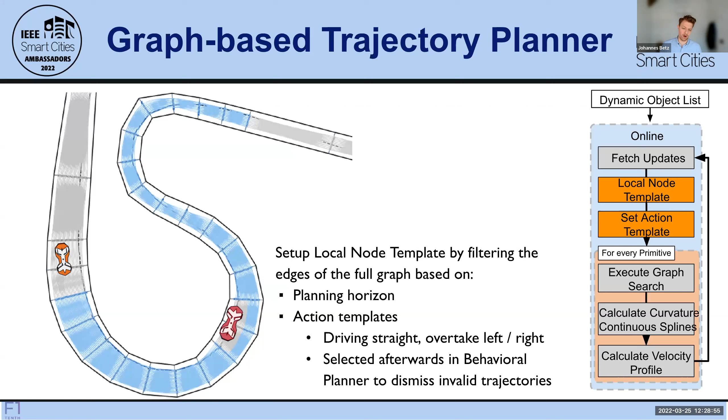When you have found such an action template, we then need to integrate the opponent prediction. This is a very important part, because with the opponent prediction, we get rid of edges and nodes that are in the future of the opponent car. You can think of that as an area our car does not want to drive in, which means the better your prediction of the opponent's behavior is, the better the path planning is in the end.

You can do that with a database approach, an LSTM approach, or even an online learning and adaptation approach. Whatever prediction you can think of, you can also say the next 10 meters in front of the opponent car is like a no-go zone for me. That's of course not the best approach, but you could do that. So now you have all the data gathered on your opponents, and now we start to create our trajectory.

What we do with that is search for the shortest path. Now you can remember why I introduced the costs, because in this blue area, we are searching for the sum of all the splines that have the lowest cost. Now you can see what that makes - if we have a completely different cost function, this creates completely different behavior of the car in the end.

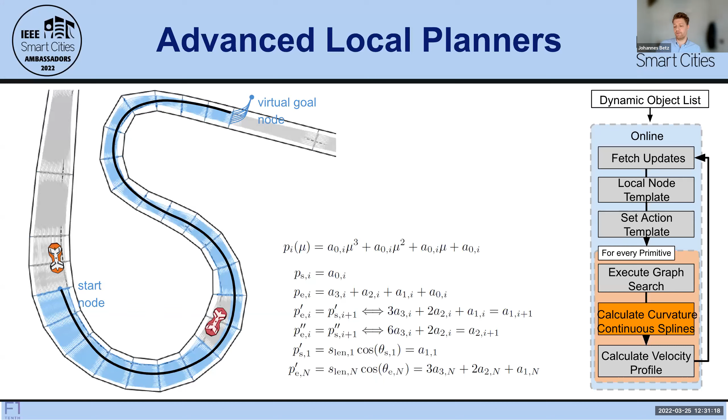The final part now is a velocity profile calculation. In our case, we can do that with an introduced forward-backward solver, or with an even bigger optimization problem that integrates energy strategy, friction estimation, and friction potential.

So you can optimize for that. And then you have the path and the velocity profile that gives you the right vehicle behavior in exactly that time step. That's now creating the local trajectory for this time step, which integrates the curvilinear distance around the racetrack, the coordinates X and Y, the heading of the car, the curvature, the velocity, and the longitudinal acceleration. So in this trajectory, everything is integrated that you need for finally controlling the car. Because right now we've only created the trajectory, but have not controlled the car at all.

Here's a short video that shows you this graph planner in action. What you see on the left side is the trajectory planner that's planning this graph with the techniques I just introduced to you. And on the right side, you see that applied to a real car. So on the left and right side, you see exactly the same behavior, once in simulation and once in real life.

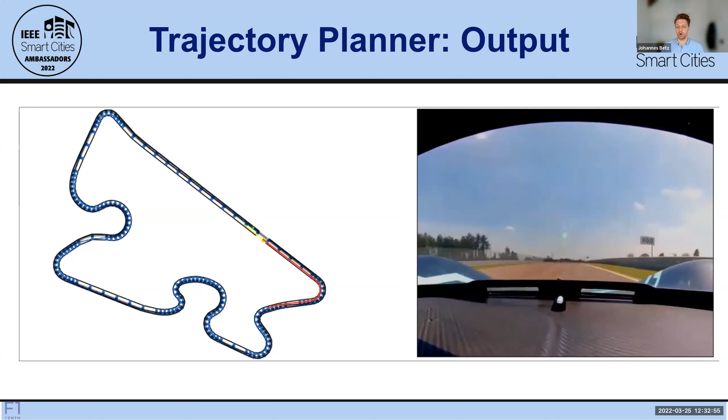What you can see here is that we are trying to overtake an opponent, and we are replanning the path every time. Now what you see here on the straight, it figured out that there is enough space to overtake an opponent. The car is driving on the right side, the opponent staying on the left side, and we are finishing the overtaking maneuver.

So that's basically the output of the trajectory planner. Now it's time for us to control this trajectory. And that's something Madhur just introduced, for example, the pure pursuit controller. When we have the raceline created or the trajectory generated, we need to control exactly that trajectory.

And we have a wide variety of techniques. Pure pursuit was just introduced. We have the Stanley controller, we have the linear quadratic regulator, or the model predictive control. Whatever you choose from, you can apply this trajectory planner or combine it with whatever controller you can think of. All of them work, some of them work better, some of them work worse. Of course, model predictive control gives you a lot of advantages, and therefore you can control this trajectory.

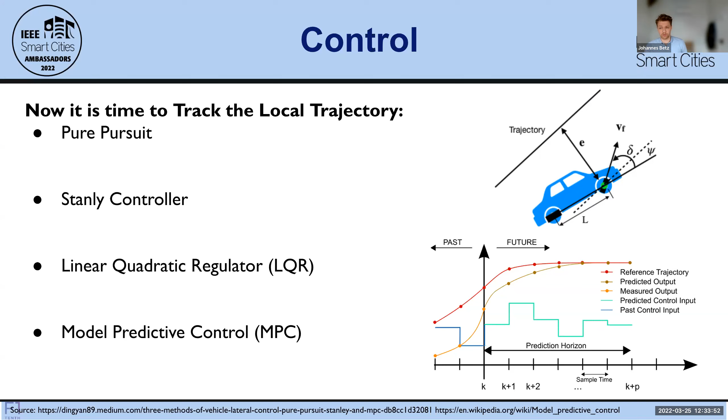I'm at the end of this short presentation about the graph-based planner. You can access all the code I just introduced here on our GitHub repository. I created a YouTube video for you that explains the code in detail and shows you how to apply this graph-based planner. And therefore, I'm at the end of this presentation. If you have any questions, you can ask them in the chat. Thank you very much for listening.

Okay, I see. So we have one question about the controller. LQR requires a linear dynamical system, but racing dynamics are not linear, so you might try to do sequential linearization or some trick like that. So the question, sorry Johannes, this is Houssam. This was my answer to a previous question that was asking, can I just use LQR? Okay, yeah, no worries. All right, great.

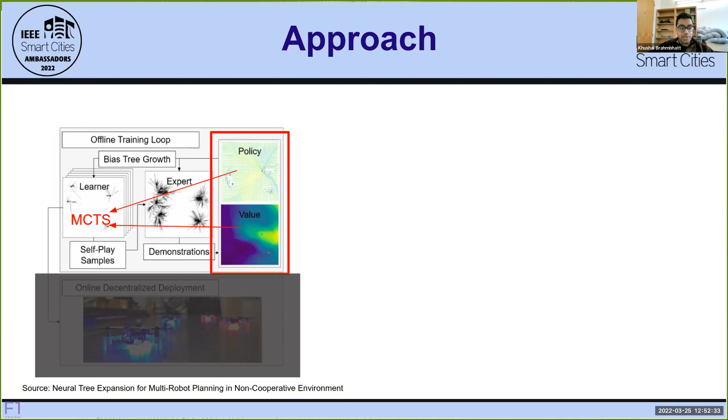This is an iterative training process where the Monte Carlo tree search algorithm keeps getting better using the policy and value networks, generating better training samples, self-play samples, which are used by the experts as better training data, continually iterating and updating the policy and value neural networks. So the policy and value neural networks are used to bias the tree growth for the Monte Carlo tree search, and the neural tree expansion algorithm is basically just an efficient way of training Monte Carlo tree search.

What we're focusing on here, our contribution to this work, was how do we assign the rewards, or how do we leverage priorities to learn a reward function, to design a reward function that can be used in this algorithm to achieve path deconfliction.

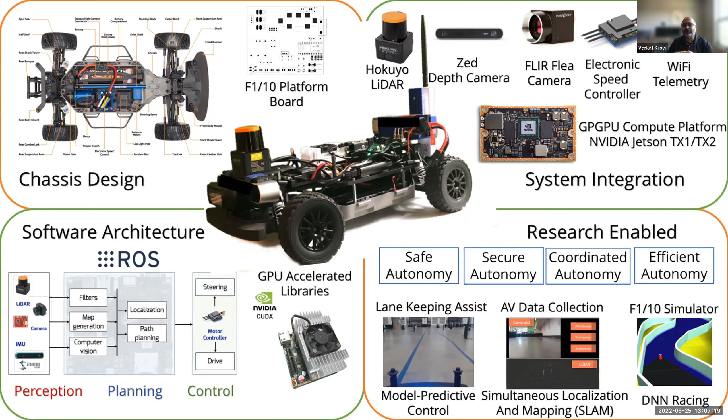On the f1tenth.org website, you will get an opportunity to do this for yourself. The mantra of the F1TENTH is build, code, and most importantly, the most fun part, race. In the next few slides I've taken some snapshots of what you see on the website.

In terms of the build documentation, the entire bill of materials for the vehicle is available. We were also fortunate that this was proposed as an NSF CCRI proposal, which was funded, intended to help create and develop this community of people interested in these F1TENTH scaled vehicles as an enabler for both education and research. In the context of education, one of the challenges we kept hearing was that it would be nice if you had a curriculum and a set of options.

There were multiple iterations of the curriculum that were developed. Some of it is on this website. Johannes, over the past year, has actually developed an open edX course. After I'm done, maybe I'll ask him to walk you through what the open edX course looks like on the website, so maybe he can get ready for that.

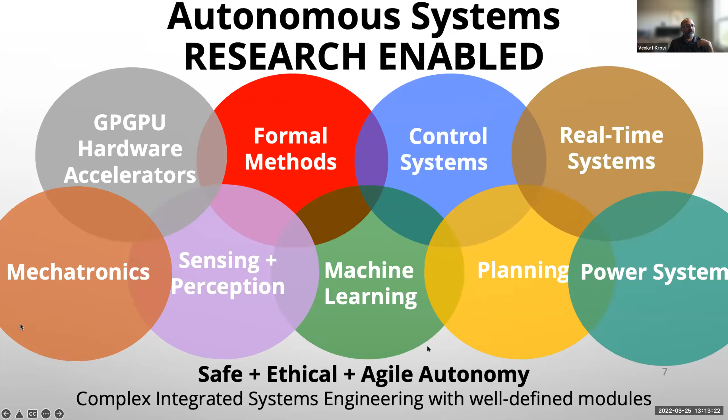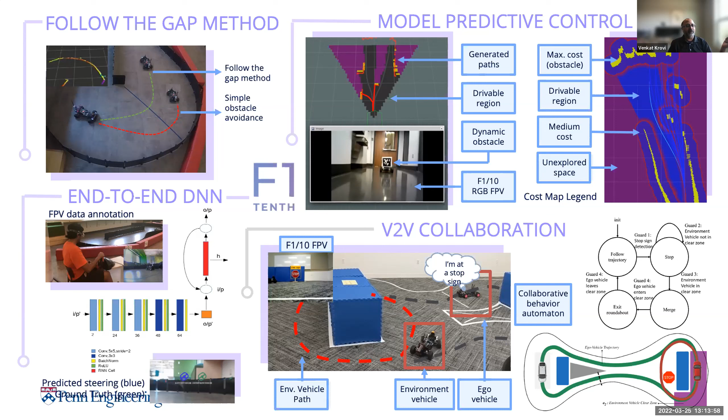So just highlights of some of the types of research that it started to enable. You saw this discussion of follow the gap, model predictive control, the notion of an end-to-end neural network learning, for example. In many cases, the courses ended up using some of these as final projects. Over the years, it's gotten better and better. These are examples of some of the final projects at Penn that were deployed in the context of these different research areas.

The simulator aspect was something that we talked about, where the ability to test algorithms in simulation and then be able to deploy in a real-time context on an actual physical system proved to be very useful. I think Madhur talked about it, Johannes talked about it. In these cases, I think sometimes necessity caused by the pandemic actually accelerated the need for the simulation dimension. So Docker-based implementations, the AI gyms, et cetera, were pushed further along in their development during the time when everybody had to go virtual. I believe Johannes was responsible for some of these aspects too.

Now, to the question somebody asked about how can I take advantage of something like this and find out more - if you navigate to the research page on the F1TENTH website, there are links to different kinds of theses, papers, and code that pertain to different research projects people have deployed using the F1TENTH platform. This is an ever-growing collection. You've got research articles, theses and projects, and also the different places where the F1TENTH has been reported in the news.